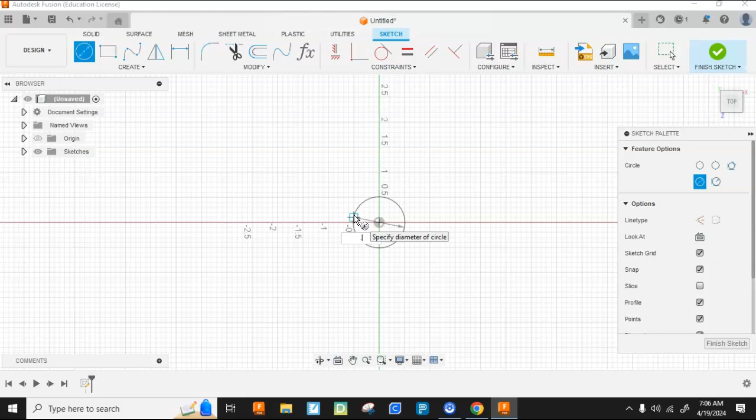So I'm going to start by creating a little center hub from which the blades are going to emanate. I'll do that by just creating a little circle down here. I'm going to make the circle 0.75 inch, 3/4 inch. I'm going to extrude that.

0.25. Okay, so now to use the loft, what I'm going to do is I'm going to travel through 4 consecutive drawings here. So I need 4 consecutive planes.

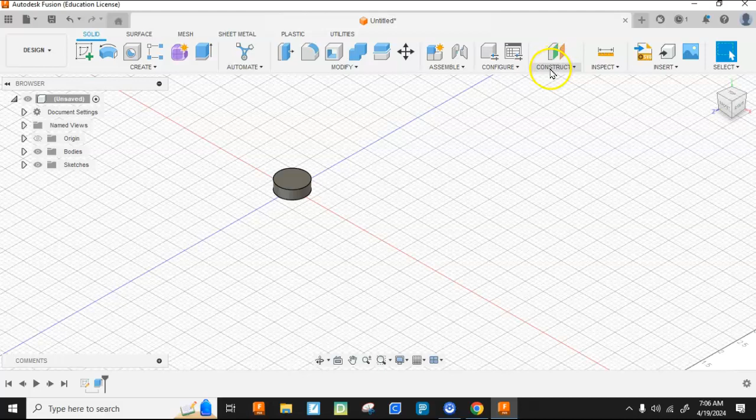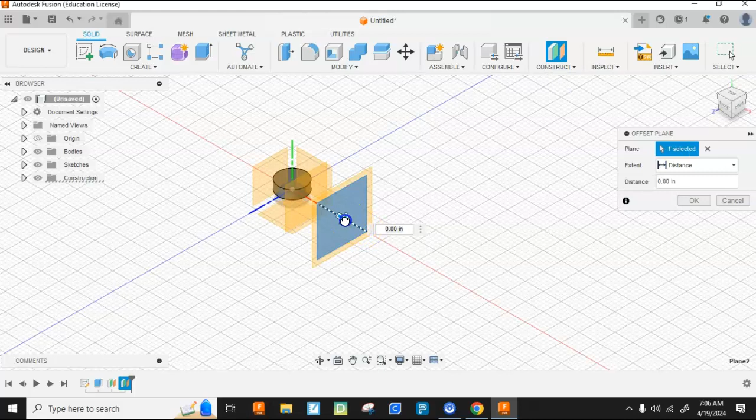So I'm going to use offset plane. I'm going to go in there. I'm going to offset from that plane 1 inch. I'll hit OK. I'm going to do that again. I'm going to offset from that 1 inch. I'm just going in 1 inch increments. And lastly, I'll offset one more time, and that would go to 1 more inch. So that's going to come out 1, 2, 3 inches.

So it's essentially going to have a rotational diameter of 6 inches. Might be a little big for an automata, but it's certainly good for CAD class and to see the automata. So you can adjust as you wish after you watch this.

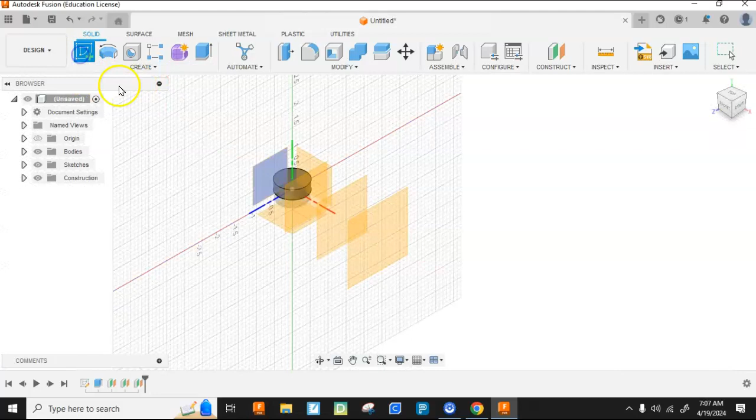So I'm going to go in there, and at the initial plane, I'm going to project the geometry off of this, including that origin, so I can get in the middle. I'm going to go to ellipse.

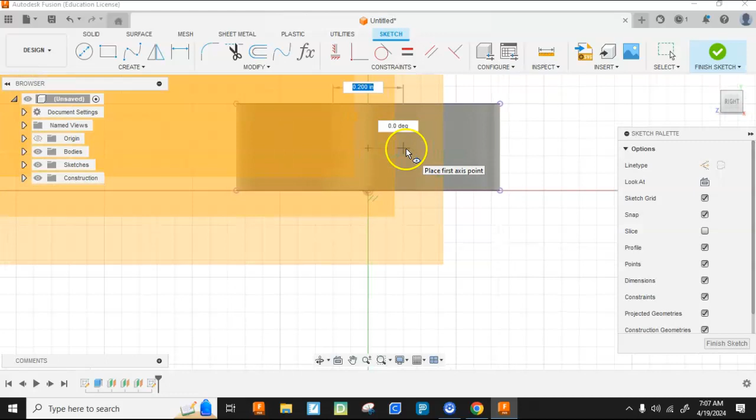So I'll snap to that and then just go straight up. What I'm going to do is I'm going to start with a flat ellipse. Left click once to determine the edge, the radius of the ellipse, and then you can control by going up and down how thick it is. Okay, so now there's one there.

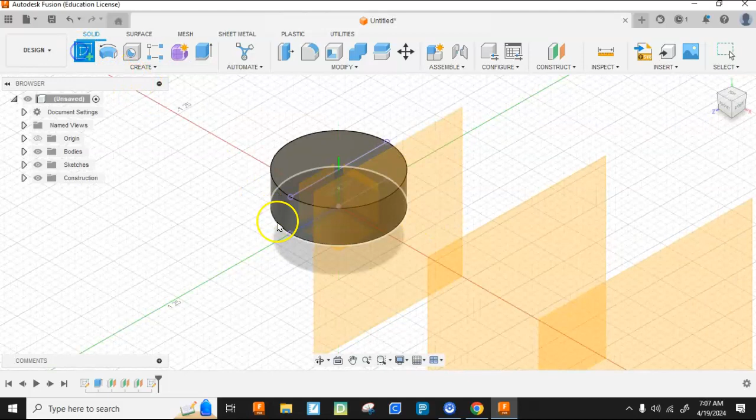I'm going to come here now and draw on this one. And this one I'm going to vary a little bit. I'm going to turn off the construction so I can see that circle or that ellipse a little easier.

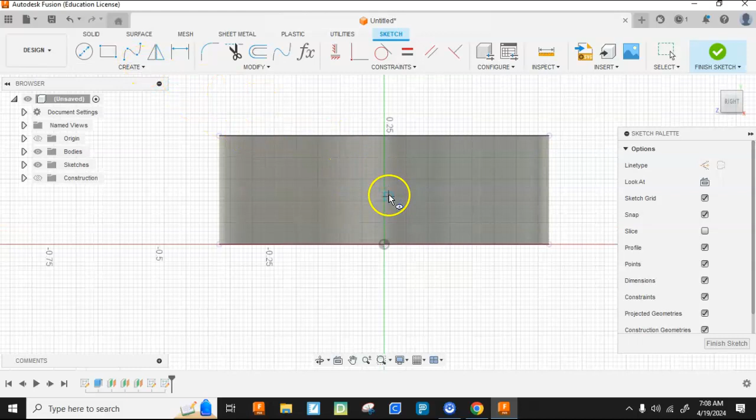So I'm going to go to that. Cancel. I might have to project this if it doesn't click on that. I believe I can snap onto that point.

Alright, so I'm just going to vary this by, say, I'm going to make it a little bit. I'm going to have it be about the same size. Go up a little bit, make it a little bigger to start, and then I'll do 5 degree increments.

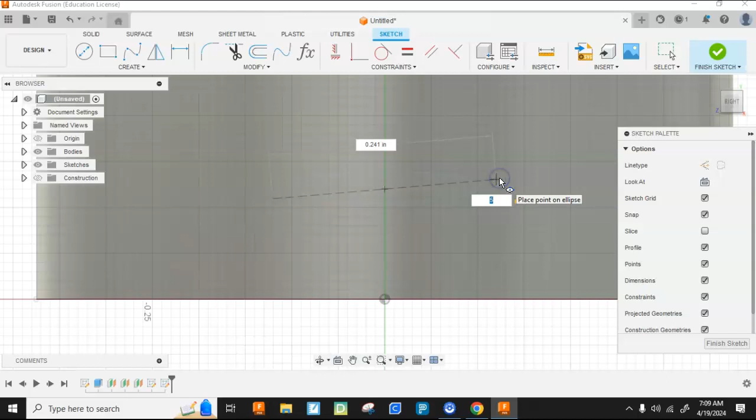So I'm going to hit tab to get to that, and I'm going to hit that. I'll left click, and then go up there, and I'm just arbitrarily determining that thickness, finish that sketch. I'm going to back out and do another sketch.

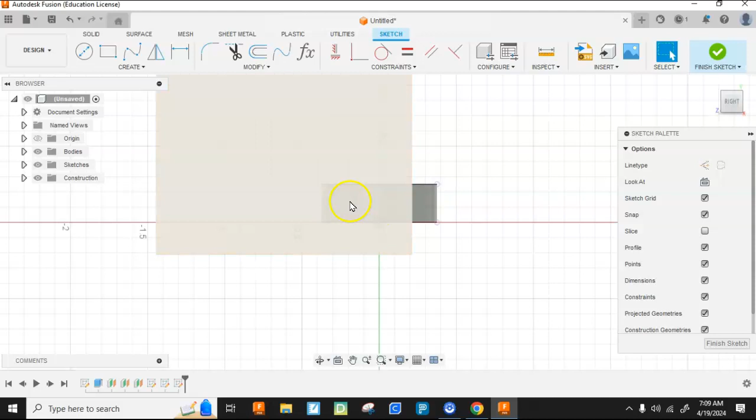I'll flip the construction on. I'll draw on this one now. And then I'm going to go ahead and click that construction back off. It just makes it a little more visible for me.

But I'm going to do an ellipse now. Snap to the same center point. I'm going to make it just a smidge bigger. And then I'm going to hit tab 10. So that's another 5 degrees. I'll left click. Thickness there. Finish that sketch.

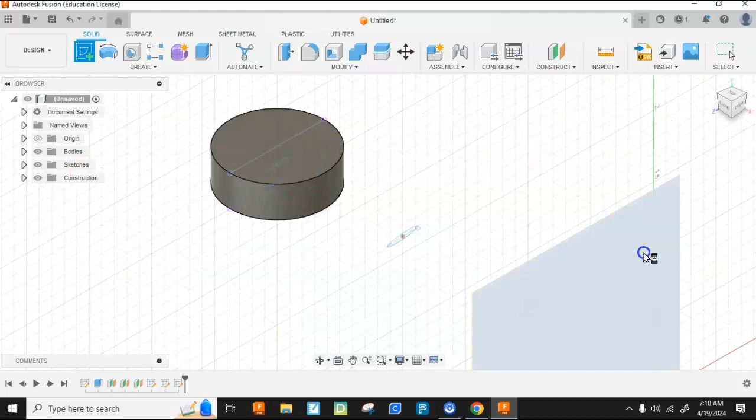And then I'm going to sketch on the last plane. And now I'm going to go to ellipse. I'm going to go in there. And this one I'm going to make a little smaller so it comes back. Tab 15 degrees.

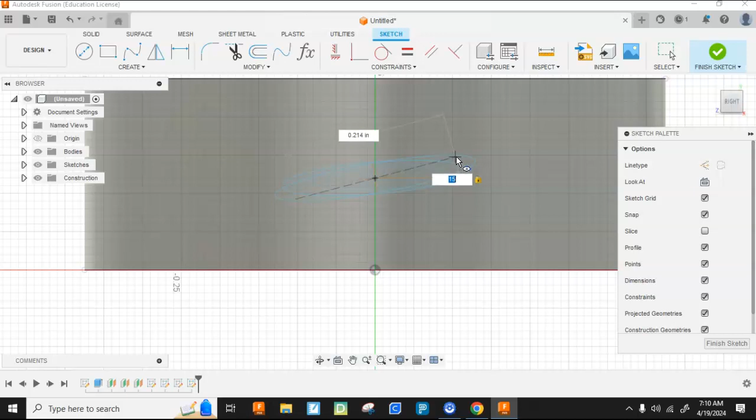Left click and make that a little thinner. Okay, so what I'm going to do now is create using the loft command.

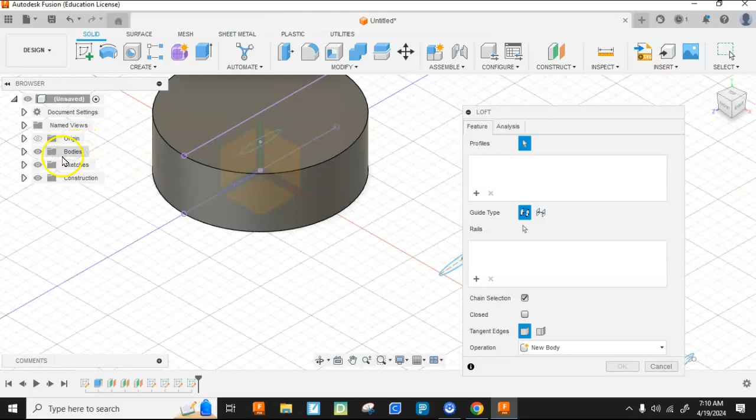I'm going to get that circle. I might have to turn off the visibility of that body if I can't grab it. That's certainly not what I want. So what I'm going to do is turn off the visibility of that body.

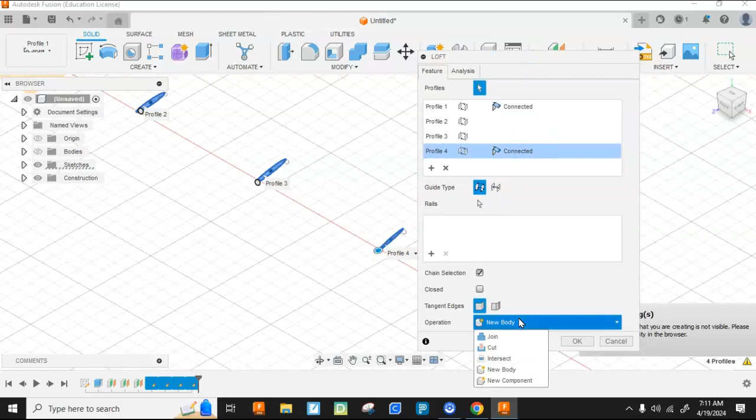Then I'm going to go through consecutively and choose all of those. Be careful you don't grab the center point or it'll take it down to a point. And then I'm going to do that as a new component.

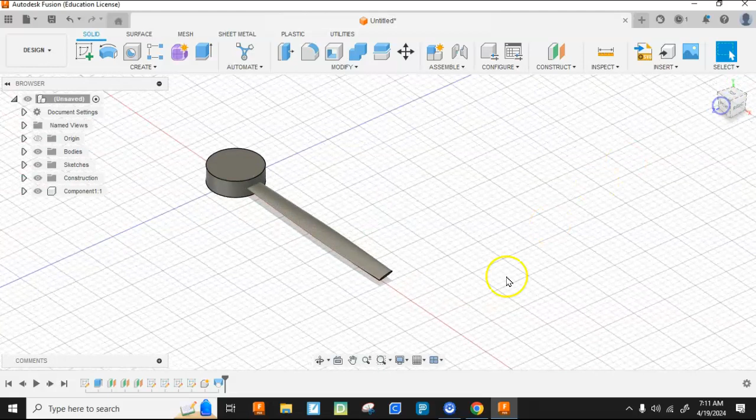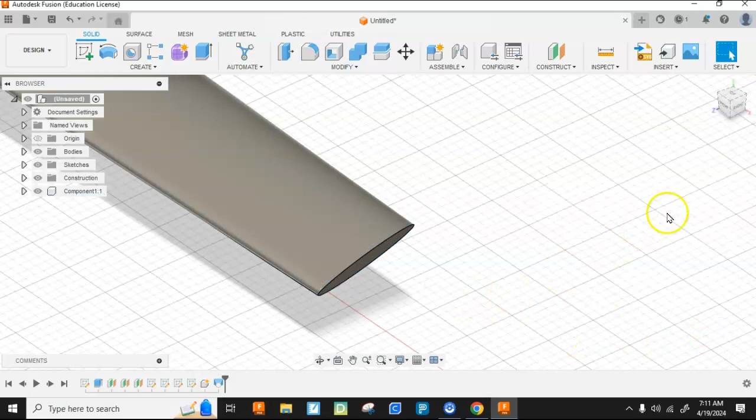So now I'm going to have to create a pattern. It'll be a circular pattern. Do this with a component, and then for my axis, I want that center axis, and depending on how many it has.

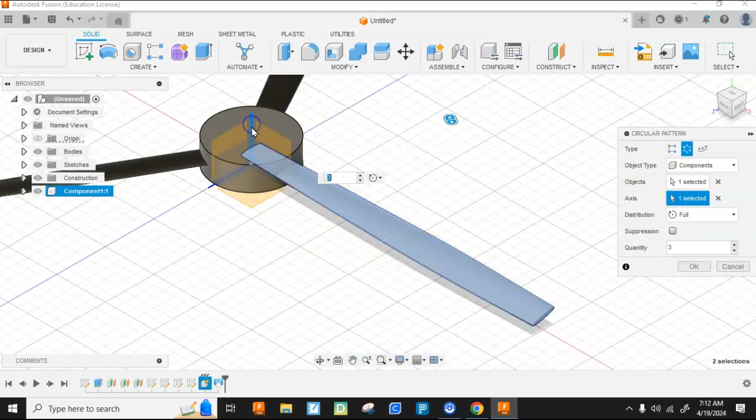So this is actually something, if I spin, it will throw wind. As if it's spun this way, as I look down from the top, if it's spun counterclockwise, it would push air down due to the angle of attack of that blade.

There's a lot more advanced tutorials if you want to get into aeronautics and fluid mechanics. We're not going to go that far, but there's a simple working helicopter.

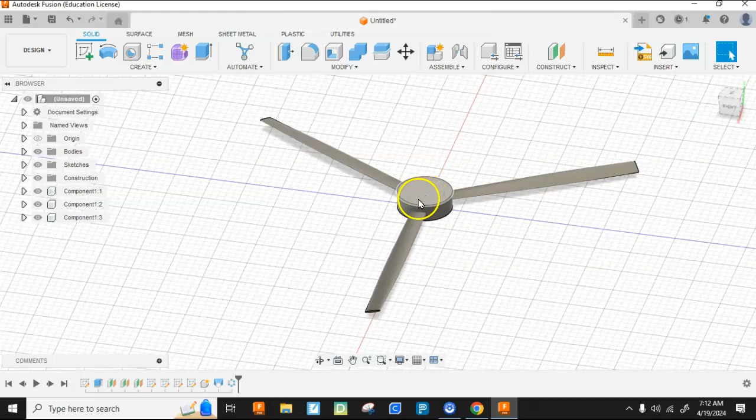I just print 3 blades and put it in. And what I mean by that is the least amount of workflow to do that would be, let's see, I'm going to doctor this real quick.

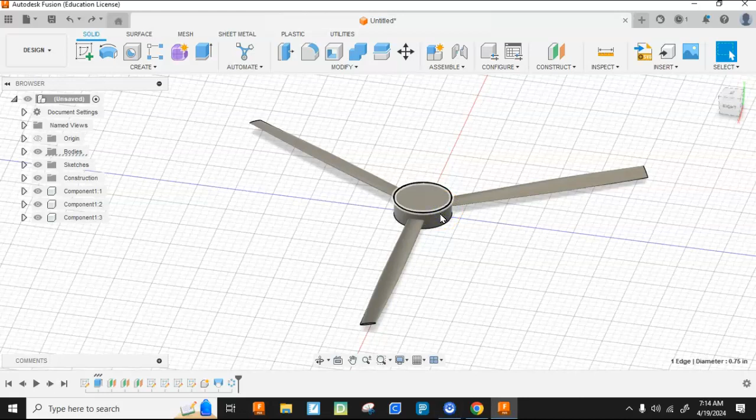And I'm going to put a little chamfer on that. That's too much. I think that looks nice.

So what I would do is I would save this. So I'd save this as blades. And then I would save a copy.

And the quickest way of doing this, if I save as hub. So blades is saved, so these blades are saved to print.

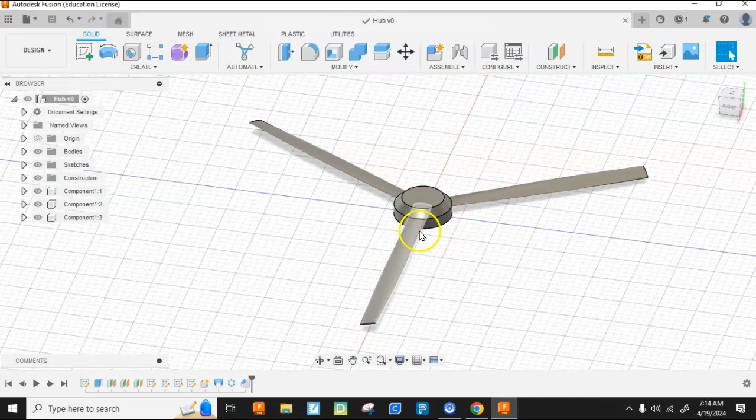Now all I would do is go down and change this loft to a cut. And if you take a look, now I would have the hub. So this hub would fit, so I'd pull those components out of the blades.

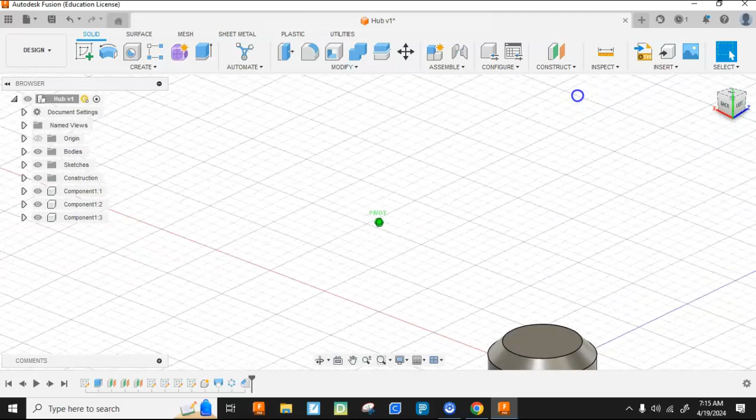Whoops. And I still want to then pattern. Oh, I see what, yeah. So I'm going to pattern that feature real quick. So create pattern circular, and that would be a feature, that cut.

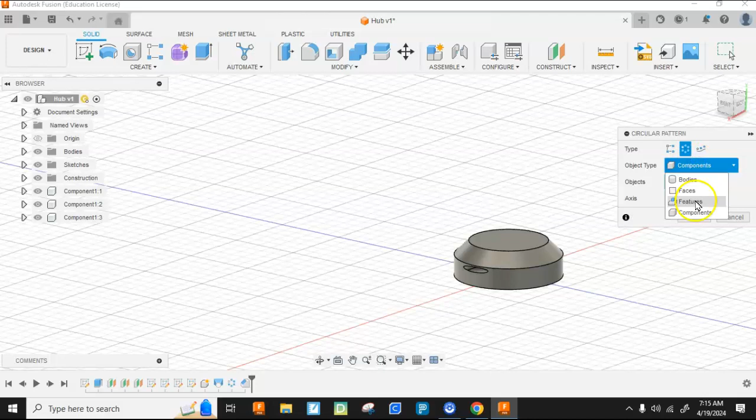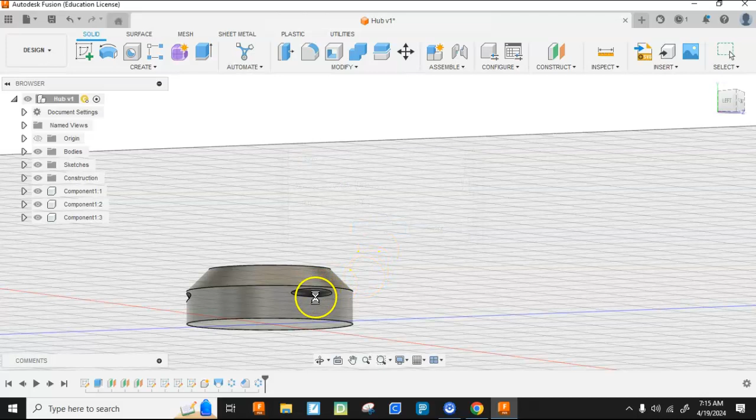So for my axis, I'd select the center, and it'd have 3, I'd hit OK, and now this would be saved. Export this as an STL, so I'm going to go ahead and hit save. So now I would export this as an STL, and then print 3 blades, and those blades would fit right in there, kind of tight.

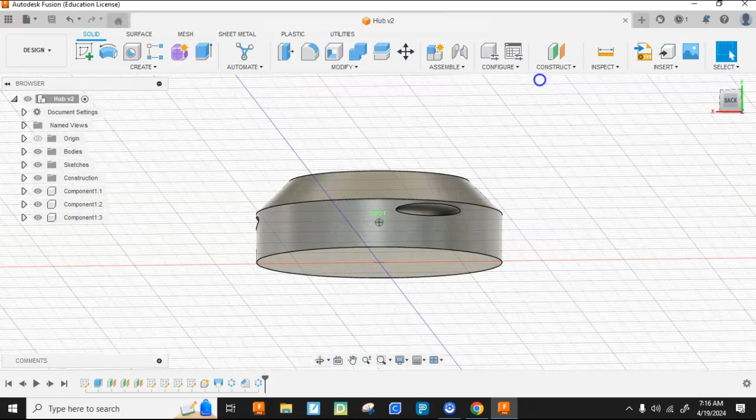Technically, there wouldn't be any allowance there. So I'd probably have to scuff it with a little sandpaper and fill it with glue and then just force it in. The nice thing is plastic will do that. I don't want to get too tough with it, but that would be a wonderful way of inserting those blades in there. Okay.